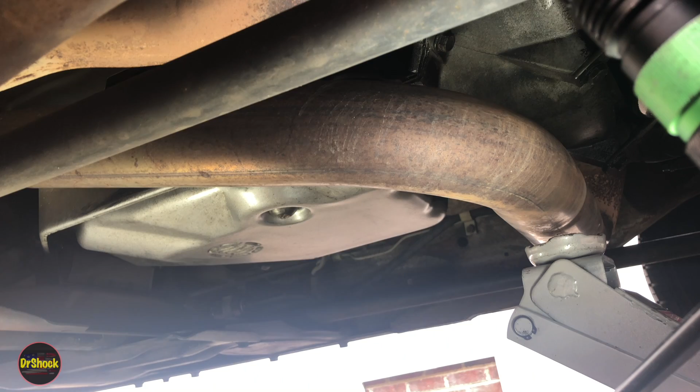Alright guys, in today's video I'm going to go over maintenance. We're going to do 4L80E automatic transmission maintenance. You should always change the fluid in a 4L80E every 100,000 miles, 50,000 if you're towing or you're living in a mountainous or hilly terrain area. So this is a good video and a good increment to share with you if you don't currently have the owner's manual for your old body style GM truck.

We're working on a 1998 right now, and in 1998 it had a Torx type bolt, a T55. Fits in like that. Now these can get kind of stripped out over the years, especially with the amount of time we're talking about here. So what I use to get these out to avoid damaging them any further, just bring a jack in, bring a piece of wood, and what we'll do is we'll get this guy in here on this piece of wood.

Like that, and that just gives us a little bit of upward force. We don't actually want to try to jack up anything. We just want to get some upward force so that we got good bite into this Torx bolt. Just like that. Bring our pan over here.

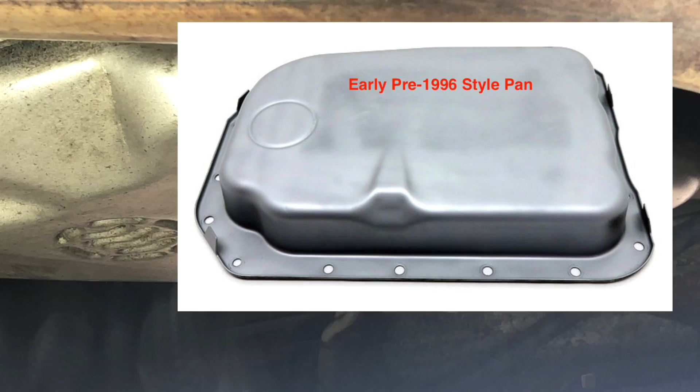I'm going to show you the other kind of bolt that you can encounter besides this T55. There's a more standard looking bolt, but it's still not exactly normal. And then also, if you've got a very early 4L80E from the early 90s, or you're working on one that's got military heritage out of a Humvee, it won't have a drain plug at all. And I'll show you how you can deal with that problem as well. So we're going to let this all drain out here, and while it's draining out, I'll go show you another truck that has the other style of drain plug.

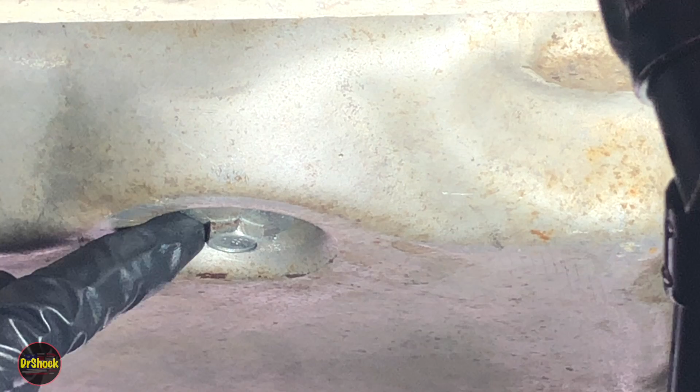Alright guys, here's a later 4L80E, and you can see on this one we've got a standard type of hex head. It's a 15 millimeter, but it's still not a standard, right? It's a very half-high. If we zoom in, you can see it's a half-high type bolt. So even on this type, you got to be careful not to use a 12-point socket, but only a 6-point socket to get it off. But this would be the AC Delco service type of drain plug.

Now, if you've got the older one, like I said, that has no drain plug at all, it'll still have this indentation in the pan. You'll still have these swiggles over here where the magnet is on the other side. There just won't be anything here, and I'll put a picture of one of those up in the upper right corner of the video for comparison.

Alright guys, this has dripped down enough. We're going to put the drain plug back in. This is just a closer up view of this T55 type original one that's kind of like a dome head to it. It's got an integrated rubber gasket on the bottom.

Alright, so now to get the pan off, we got 18 or so 10 millimeter bolts running around the perimeter. It's all pretty straightforward except for these ones in the back. These ones in the back come up with 3/8 hardware. What you'll see is that the rear transmission mount is going to get in your way on being able to get a socket on these 10s that are here. And what you'll have to do is use 1/4 inch hardware to fit in there.

The other thing I'd point out to you is this particular one over here. You notice there's a hole in the frame cross member. That's there on purpose for doing this particular maintenance. You run your socket extension up through this hole. You put the socket on. And now we have access to this bolt that's here.

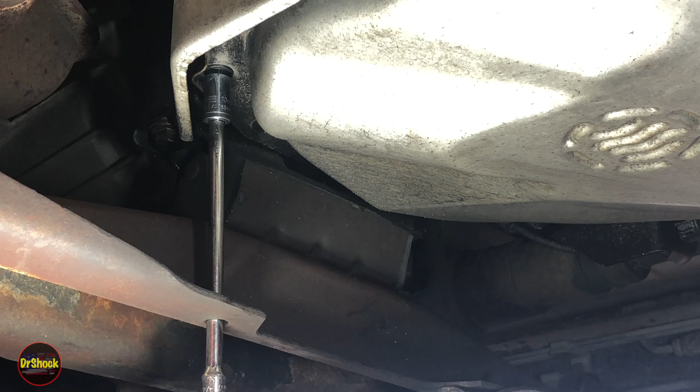So I'm going to go around with this breaker bar. I'm going to break the torque on all these, and then we'll zip them off, and then I'll show you which ones we leave on to deal with the case if you don't have a drain plug on your pan, if you have a very early 4L80E. Alright guys, right beside this service access port here, there's also another one over here to help you get the corresponding transmission pan bolt that's right above this one.

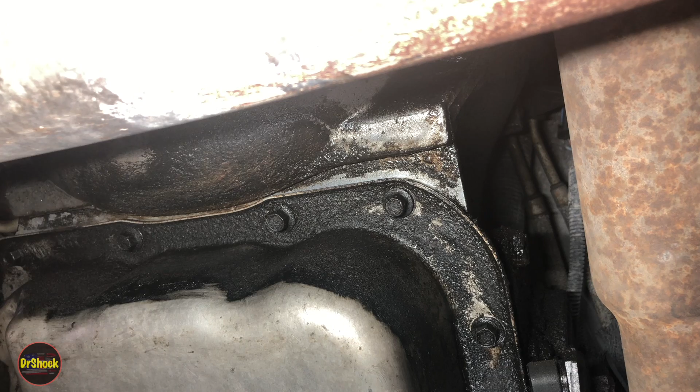Alright guys, we're on number 17 here. I guess there's 17 of these. Breaking the torque on this last one. Alright, now we're going to switch to the electric ratchet and we're going to zip these guys off. And we'll go through as if we didn't have a drain plug. That means I'm going to leave this guy that I just loosened up here, and I'm going to leave the one that's exactly opposite on the corner down here. I'm going to leave these two on, and I'm going to take everything else off. We're going to fast forward through this because there's nothing really to see. We're just removing fasteners.

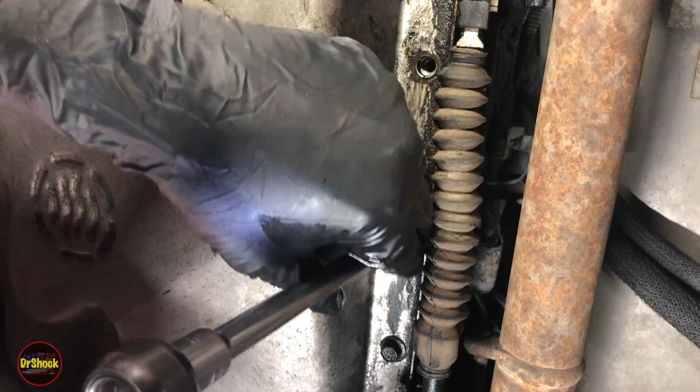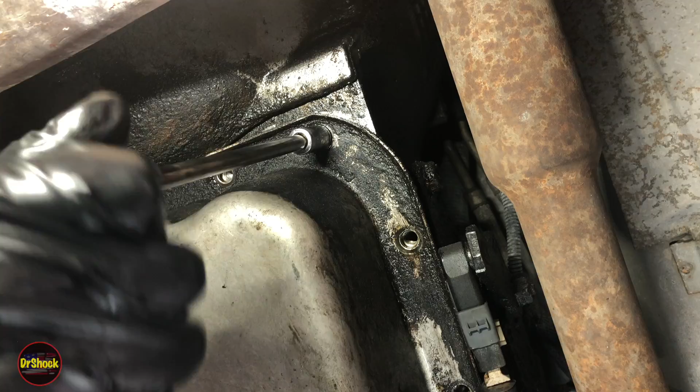All right, so if we didn't miss anything, we've gotten all these. Let's do a real quick finger check. All right, so we've just got the one in the corners. So we're going to loosen these up now. I'm not going to remove them though. Just going to make sure we got them where we can move them by hand. That one feels good.

Slip this guy in without going through the hole because he's already loose now, so we don't have to. And our pan is going to let go nicely. All right, so what we're going to do now is I'm going to bring another kind of drain apparatus into position.

You can use a large basting tray as well. But we just want to have some more width to what we've got to work with here than we get with just the standard pan. Reposition the light for you guys.

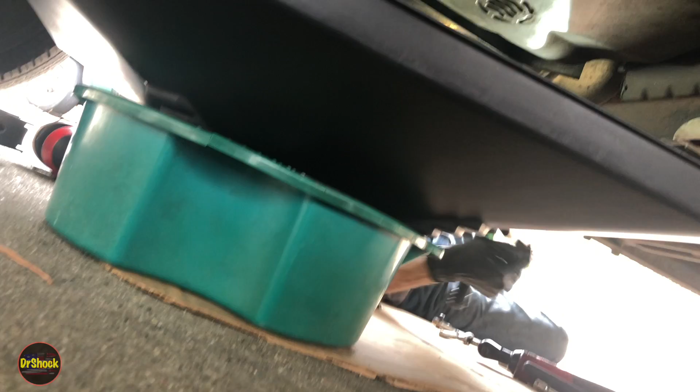All right, so now if I don't have a drain plug, this guy's full of fluid. So what I'm going to do is get this where I can remove it by hand. I'm going to pull this back to completely cover the dimensions of the pan. I'm going to take this guy almost all the way out. And I'm going to start doing the same thing for the one that we had up in this corner up here.

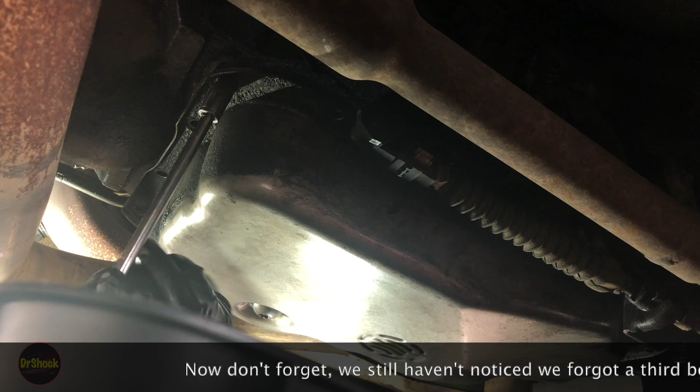All right, so now it should be at a point where I can take them off with my finger. So push up on the pan, take this guy in the back out. Again, we're just doing this for those of you that don't have a drain plug. Obviously, we don't need to go through all these gyrations normally. Take this one off up here.

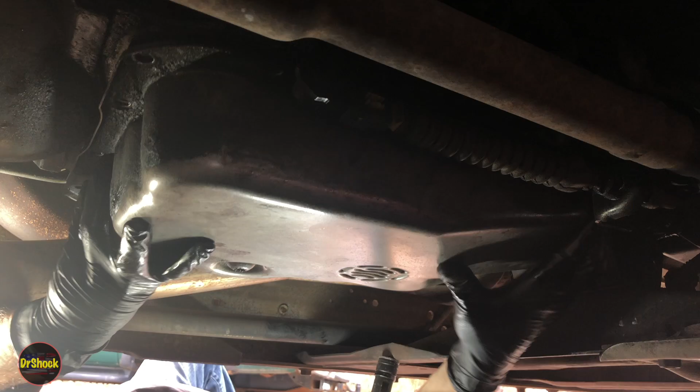Because now you've got a controlled drop, right? So normally this would be full of fluid. You'd let it down. You got to get it off of the parking cable assembly over here. And that's when it's going to start dripping out. Of course, what you don't want to do is what I just did. I left one bolt in up here. Sorry about that, guys. Didn't see him back here.

All right, so now you work him off of that parking cable assembly like this, and then you'll be able to let it drip on this corner that I'm holding, just like you see there. And now you can hold it and do a controlled drain. I know I'm blocking your view at this point, but you guys get the idea. So at this point, I'm just going to lay this guy in this oversized pan so that we can see up on top here. So a quick wipe off of any dirt on my hands, gloves.

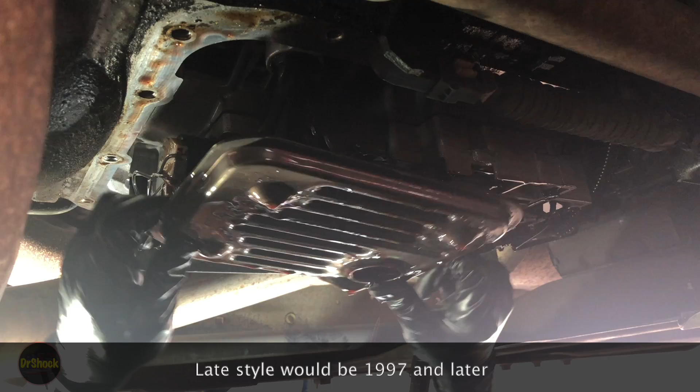Next, we've got the filter. So this is a late style filter. There's a late style and an early style. Filter just comes off by wiggling it off. And then there's a bushing up there we have to replace as well. We'll let this drip some more, and I'll show you replacing that bushing.

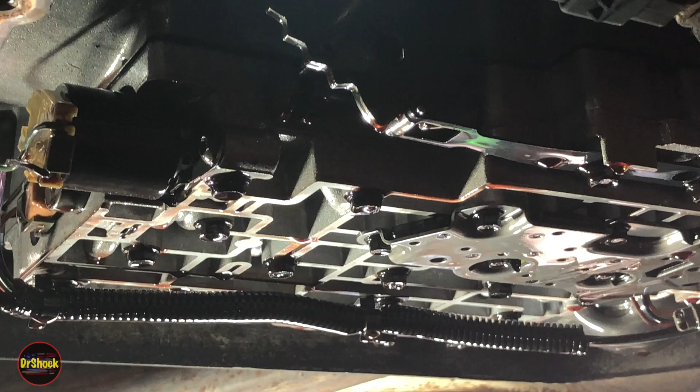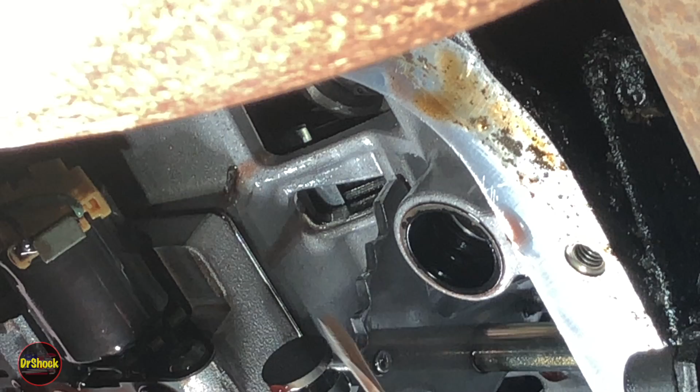All right, guys, we're on the driver's side here, and here is our filter bushing right here. It's press fit into the case. The case is aluminum. The bushing is rubber-clad steel. There's a couple of ways you can remove it. If you have a blind hole puller, you can pull it in here, and you can use a slide hammer to take it out. I prefer the deform method. I'm going to deform the bushing so that we can pull it out that way.

I just prefer to use a screwdriver to start, but you don't want to finish it with that because that kind of tool can be damaged, so we're just going to switch to a small 1/4 chisel now. Guys, I'm not trying to be gentle with it, but it's an awkward position I'm in because of the camera.

All right, there we go. It's a little bit more awkward having the camera in the way. It doesn't normally take that long to do this. What I'm showing you here is you want to see that on the aluminum, we don't want to cause any damage to the outside or this chamfering in the middle.

So now what we're going to have to do is go all around the gasket sealing surface. We're going to have to clean off all the dirt that has intruded into that, get all this cleaned off all around the perimeter, and then we'll clean the pan and check the magnet. All right, let's pull out what we've got.

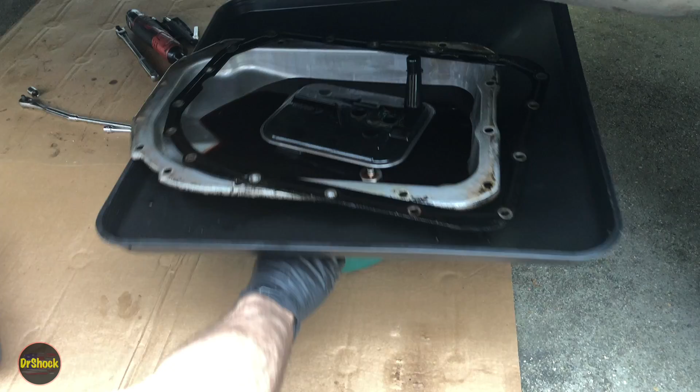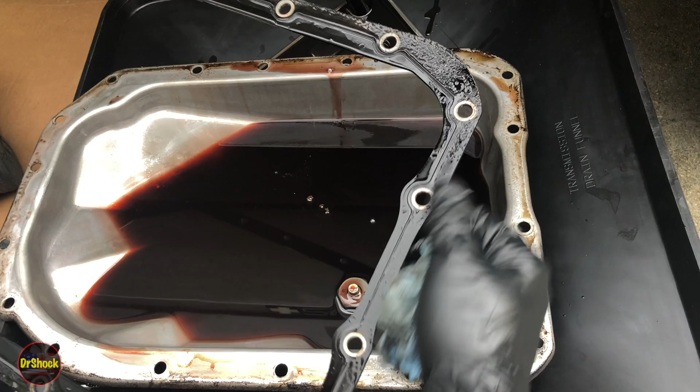Get this guy over here where it can drain. Now these factory gaskets, these are completely reusable as long as they're not cracked or broken, and as long as these stainless inserts are all still secure. So that's one of the advantages of using OEM parts. Let's go ahead and dump this out.

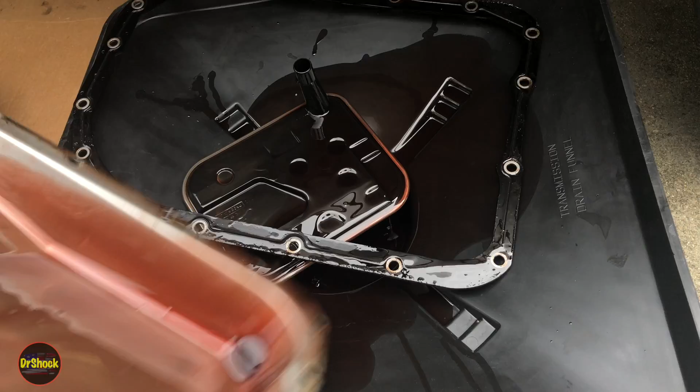So then what we'll get going here is we'll give this a cleaning, but the most important thing you want to check right off the bat is we don't see any large chunks or slivers or pieces of obvious metal fragments sticking to the magnet. That's what we want to be looking for. What we have is this kind of dust, which is just normal wear.

So we're going to brake clean this all out. Get as much of this in here as we can so it can be recycled. We'll brake clean it all out. We'll do some cosmetic cleaning on the outside. We'll clean up the gasket and reuse it, and we'll show you the new filter and installing the new bushing.

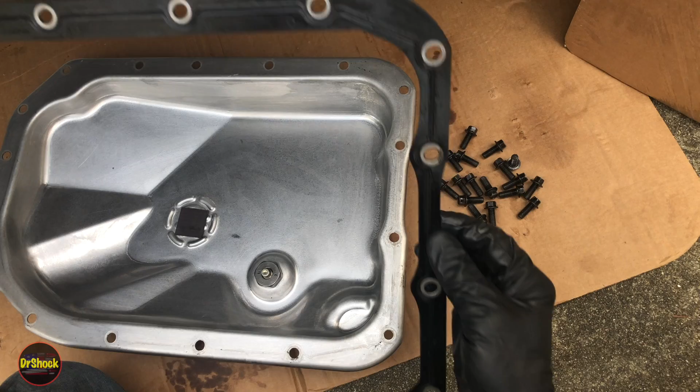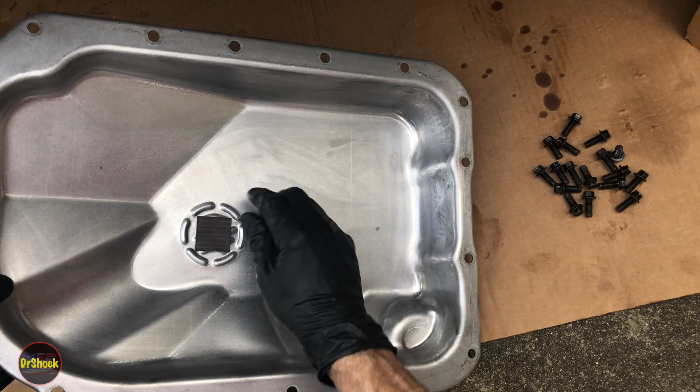All right, guys, we've got this all cleaned up. There's our original gasket. No cracks. None of the inserts are damaged or loose, so we're going to reuse this guy. We got the pan and the magnet all cleaned. You definitely want to have this magnet be here. If yours is missing, I'll leave a part number in the description so that you can order a replacement. This is the level of clean we want.

On this side, we're not after as much because this is going to get dirty anyway, but we scraped off a lot of this dried up mud. There was also some oil from a previous engine oil leak that had dried up on here, so we got all that cleaned up. So we're ready to reinstall the pan and the gasket. We've also cleaned up the 17 bolts.

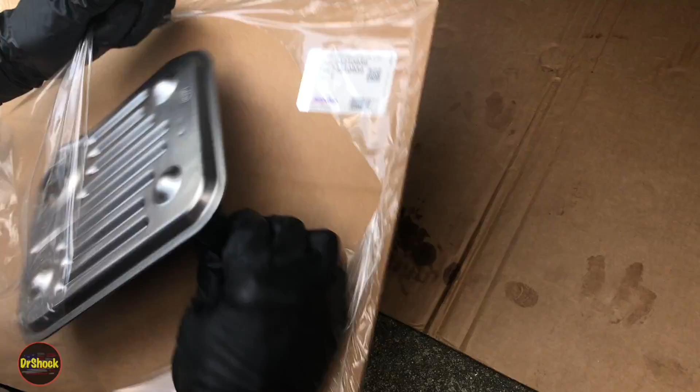And what we're going to be putting as far as the service package together is this GM 24210956, and what that is, a new filter and a new bushing. So the filter's obvious how that goes in. I'll show you that in a minute, but now we got to install this new bushing to take the place of the one we took out. So we'll go back on the other side and we'll push this guy in.

All right, guys, we're going to install this bushing with a 28 millimeter outer and a 19 millimeter inner. There's just some residual transmission fluid on the bore. We don't particularly make any effort to lubricate anything, but whatever's there is fine. You don't have to brake clean out the interior. In fact, I would highly recommend you do not squirt anything up there like that.

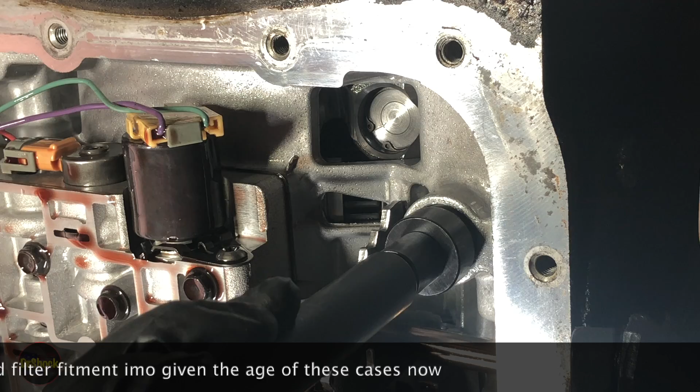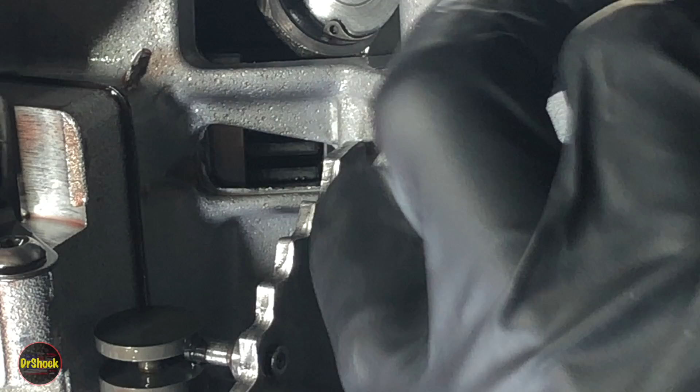You'll hear that sound it makes when it fully seats. So you know you're done. Reach over here and grab our filter. Now for the filter, I'm just going to take a little bit, very tiny amount, and then I'm going to wipe it off. Like a microscopic film that you can't even hardly feel, just so that it slides in better. It still should be difficult, but this will make it a little bit easier.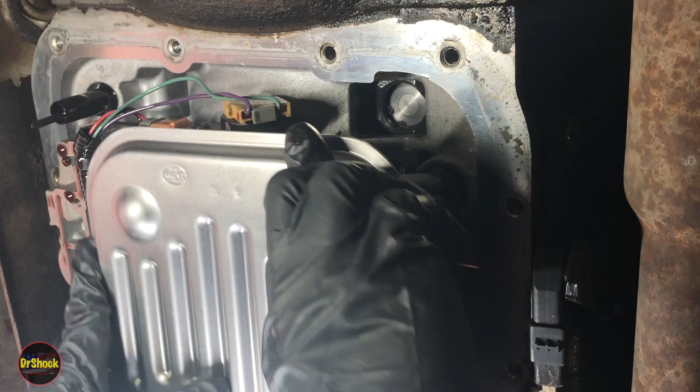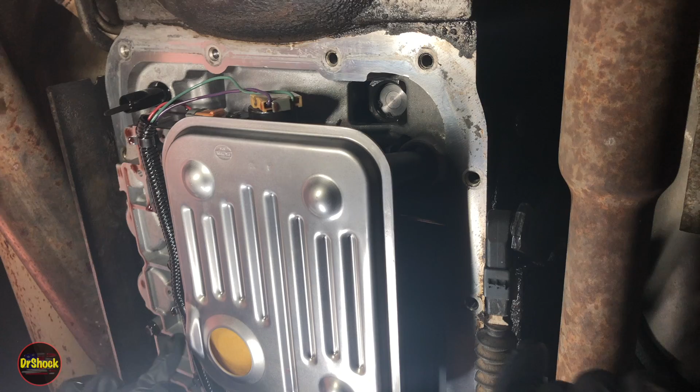There we go. Nice tight fit, but still no damage to the bushing where the rubber is clad on the interior. Okay, at this point, I'm going to have to reposition myself, and we're going to put the pan back on, and we'll start those bolts up. All right, so like I said, this is a late style filter. It's got some little feet. They're going to sit on the pan. We're going to bring the pan into position, try to keep the gasket lined up. We're going to run it under the shift mechanism.

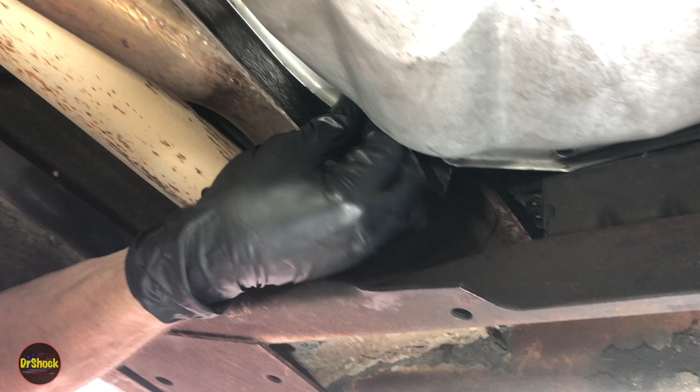All right. Then we're going to try to get this bolt going on this side first. And we're going to start them in by hand. Remember, steel bolts into an aluminum case, always start by hand. Finger tight will hold everything in position. And then I'm just going to go around here, guys. Put the one in the back corner here next, just like we did before when we were removing it in this case where there was no drain plug on the pan.

Just give it a little push up. Finger tighten this guy in. I know you can't see, but you saw in the front what I'm doing here.

All right, so now we're just going to go on each one of these and do the same thing, except I'm not going to run them all down by hand. That's too time consuming. I'm just going to get them started. And the reason we didn't tighten everything down is in some cases like this one, I had to push the gasket out of the way a little bit. We'll run them all down with the electric ratchet, and then we'll come back around and we'll torque them to the value I showed you earlier in the service manual. So I'm going to go ahead and do this, and then we'll come back when it's time to torque.

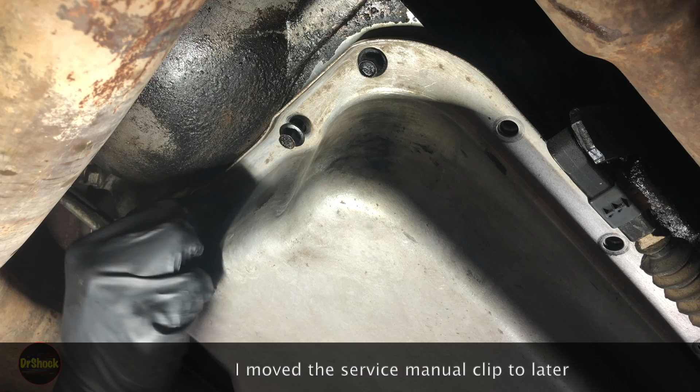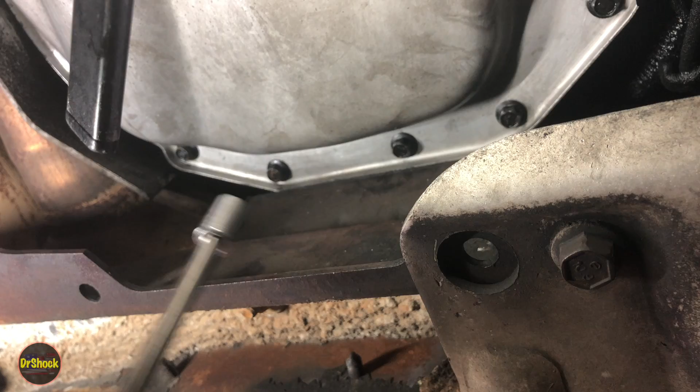All right, guys, we're just here at the back, just checking the torque on this one that I just did. This guy here. Now these get, like we saw in the service manual, I'm making a satisfying click, but there it is. All right, 18 foot-pounds. Come up through this access hole here to get this guy.

All right, so those all sounded good. Wonder why this guy just didn't sound healthy. There we go. All right, so those are all torqued, all 17 of them, to 18 foot-pounds. Our drain plug bolt, this guy gets torqued to 25 foot-pounds. So I'd recommend you do the same thing, if you have the Torx type, with the little block of wood between the torque wrench and this guy to keep it from stripping. All right, we're ready to go up on top and start filling her up.

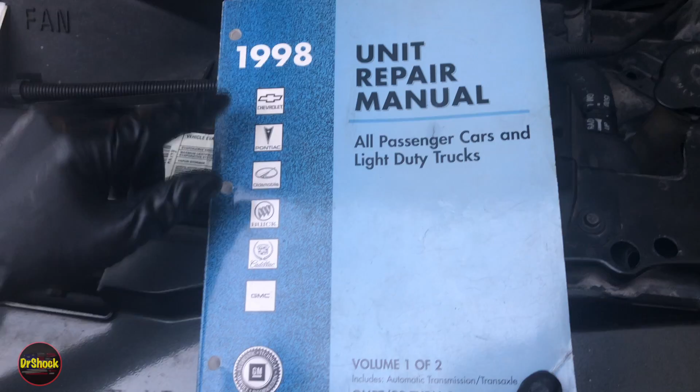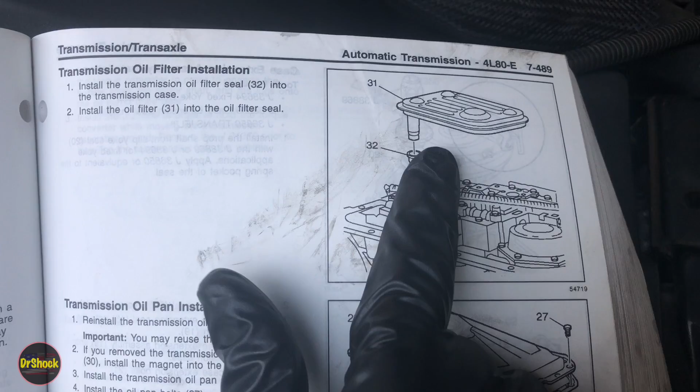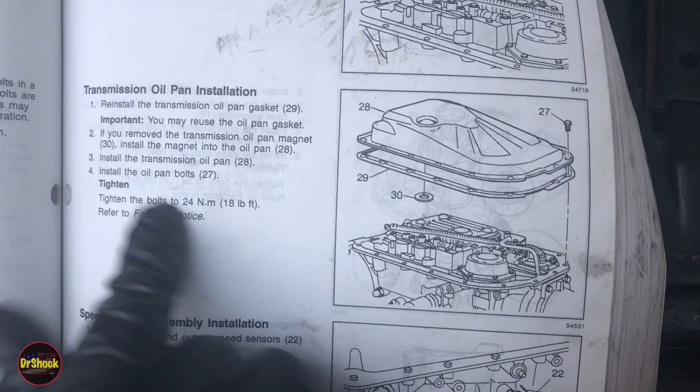All right, let's take a look at the service manual. We've got the 1998 unit repair manual. We're going to go over to the 4L80E section, and we're going to look at the section about the transmission filter installation. So here's just a picture of that, the filter and the bushing or the seal. Here's the pan, pointing out that you can reuse the pan gasket like I mentioned. There's no particular ordering to these 10mm bolts, but they get torqued to 18 foot-pounds. Now you notice on the picture here, this is an old drawing from the original 4L80E. There is no drain plug, like I was mentioning earlier. So they don't talk about the torque for this in this write-up.

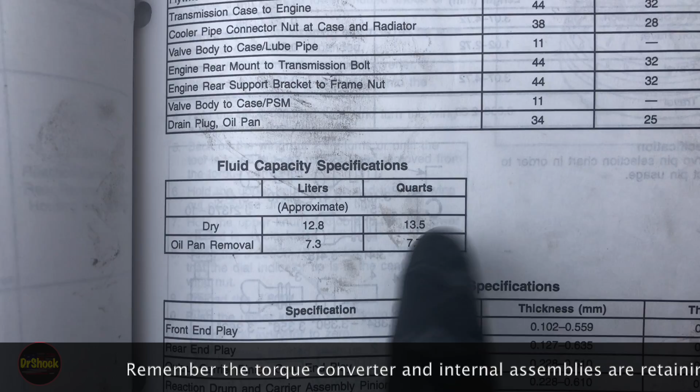We have to actually go to the front of this, and we can see a couple other pieces of information. First of all, we can see the oil pan drain plug is 25 foot-pounds or 34 newton meters. And again, oil pan to case, 18 foot-pounds or 24 newton meters. We can see that with removal of the oil pan, she should hold approximately 7.7 quarts. Dry would be a rebuild. So 7.7 quarts should be about what we're looking at. Now, how do we go about refilling it? Well, I'm going to consult a different book for that. We're going to go to the 98 Service Manual, Volume 4, and we're going to go over here to the transmission fluid checking procedure.

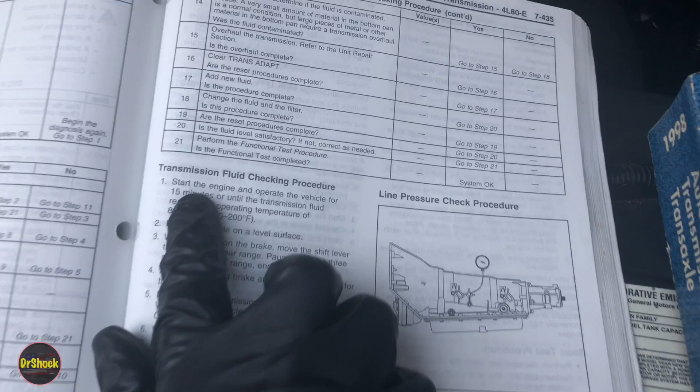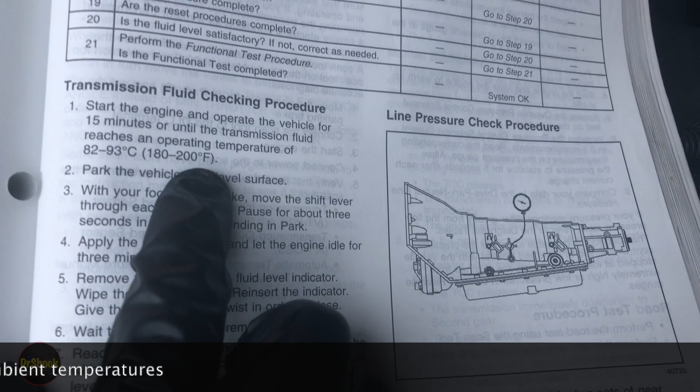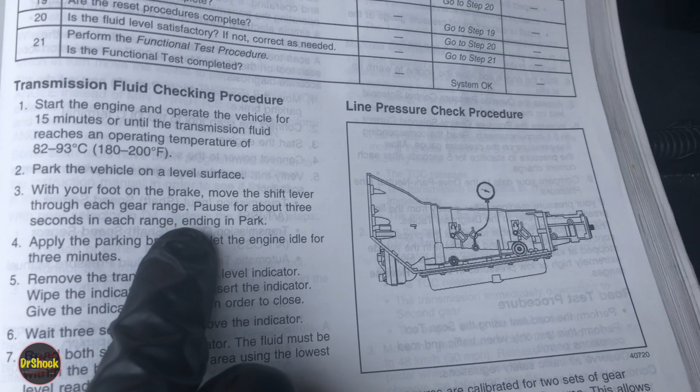So start the engine, let it run for 15 minutes. We're going to use a scan tool to see that we get up to this temperature of between 180 and 200 degrees Fahrenheit. The fluid level is not accurate on any GM transmission until it's warm. So we got to get this up to temperature. Got to get it on a level area. You can't be on an incline on a driveway. You got to be level to do this test. With your foot on the brake, you're going to move through the gear range. This is going to cycle fluid through all of the different gears so that all the fluid gets through the channels in the valve body, and we push all the air out. That also helps with heating everything up.

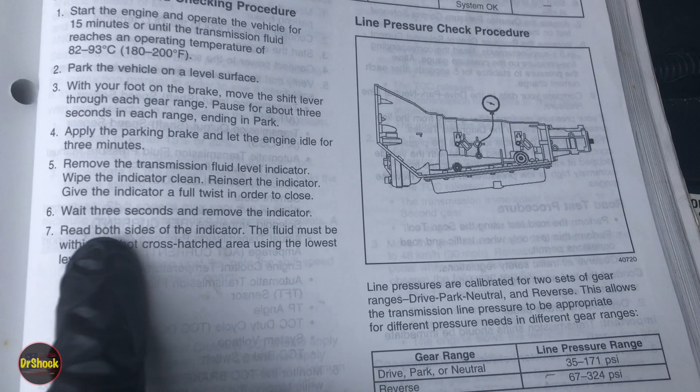We're going to let it idle for 3 minutes after we go through the cycling, and it gets to this temperature. Then we'll be able to pull the dipstick and check to see where we're at, and then keep adding to get to where we need to be. Wait a few seconds, remove it, and check it again, right? Again, there's a pro tip here. You always check both sides of the indicator, because sometimes you get splash on one side, and it might not be the actual reading. This applies to an oil dipstick as well.

So on these models, you're always going to find the dipstick here in the back. There's a lock. Pops like that. If yours is busted or doesn't stay in place, I did a video a while back on these. I'll put it up in the upper right, link it to show you how to replace this and what the part number would be. So we're just going to take this guy. We're just going to wipe him off so that we don't have any spillage. Whoops. Got a towel that doesn't want to be used here.

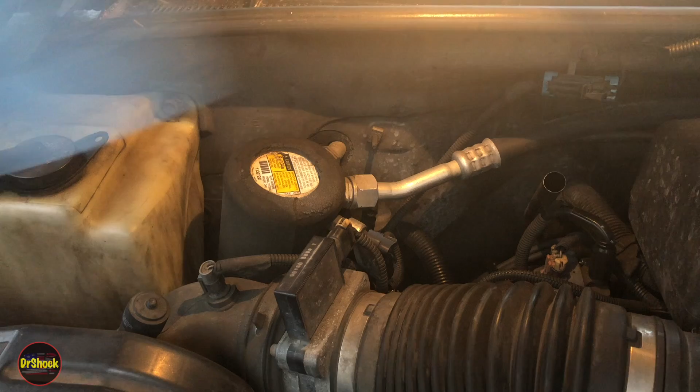And we're going to insert a long funnel that fits into this just perfectly. And then what we've got here is a gallon of AC Delco Dexron 6 ATF, and then we've got 2 more quarts. This will give us about what we need. If not, we have some extra.

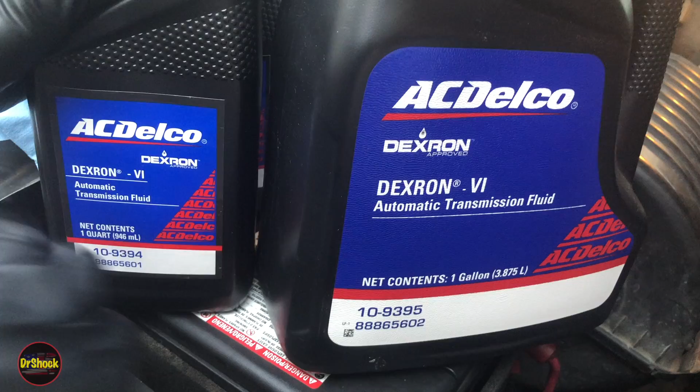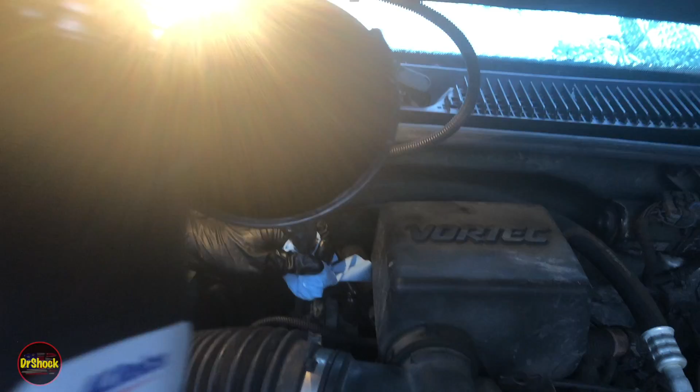So what I'm going to start with is adding the gallon. Then we're going to do the procedure I showed you, and then we're going to check the fluid level from there, and we're going to add the smaller ones as we go. So we're just going to pour this whole guy in first. Now, just in case we get a little leakage, I'm going to hold it at the base. And then we'll come back after we get to the point of warming up the engine.

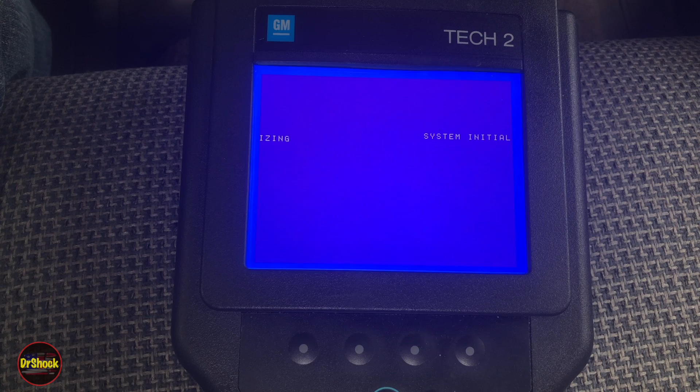All right, guys, we're going to start the truck up. And for this check, we're going to need a bidirectional scan tool that's capable of reading the sensor in the transmission that indicates its temperature. So let me get this Tech 2 fired up here, and we'll show you what that looks like.

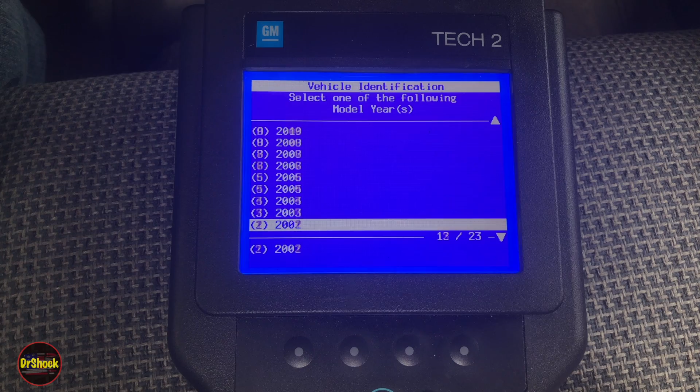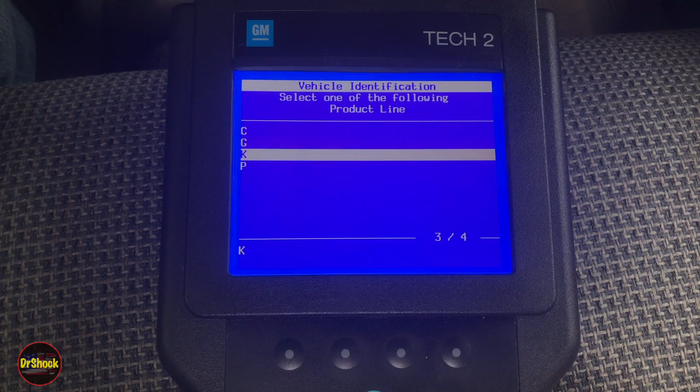So why are we having to check this? Well, if we just put in the 7.7 that we saw in the service manual, there's a very good chance that'll overflow it. Because in reality, between 4 and 5 quarts, in my experience, is all that you need on a pan drop and filter change like this. So we want to make sure we get this right, just like the service manual says. We got to have a way to read this.

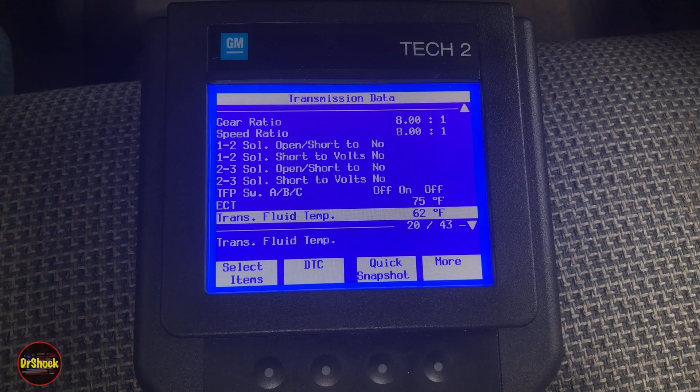So as soon as we get the transmission data up here, we're going to search for the PID for the temperature. There it is, right there. Okay. Get it up here in the middle. So right now we're sitting at 62 degrees Fahrenheit, so we got a long ways to go. We saw in there 180 to 200 degrees Fahrenheit.

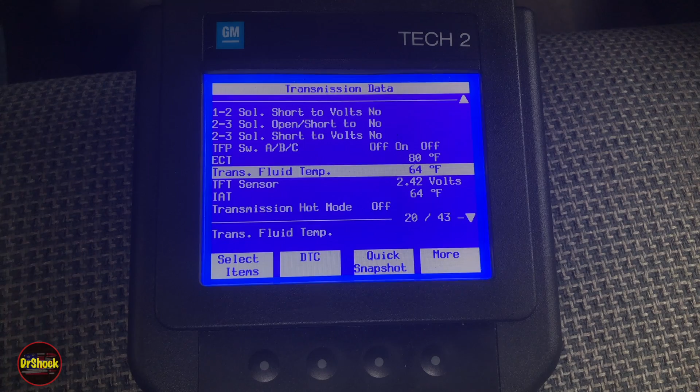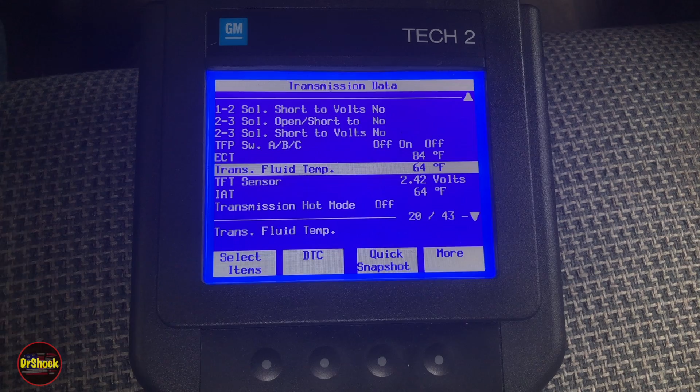Now what the service manual doesn't indicate is that temperature doesn't take into account ambient. In the summertime, that was probably a good range. We're sitting here in late winter, and there's no way this is going to get up to 180 degrees with the cooler taking that ambient air in. So you're going to hunt for the temperature where it maxes out after that 15 minutes of activity. For this ambient temperature, which is in the 50s, I'm going to expect somewhere between 140 and 150. In the summer, I would expect 180 or more like we saw in the service manual.

So what are we going to do? Well, we're going to let it idle for about 5 minutes, and then we're going to work it through the gears like we saw in the service manual. I'll go ahead and do that now to show you. If we look on the dash, all they were suggesting was that you work it into each gear. So reverse, 1, 2, 3, neutral, 1, 2, 3, drive, 1, 2, 3, right? 3 seconds in each one, and walk it down.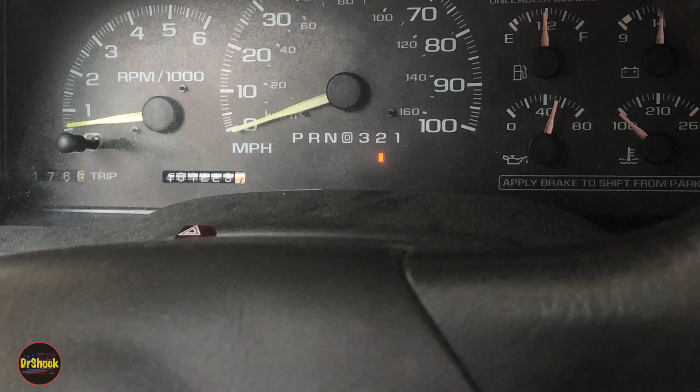And what you should be feeling for is it engaging. If you don't have enough fluid, it's not going to engage, so it's not going to move. So you walk through these. That helps get all the air purged out of the valve body and the channels inside the case. And then if you feel it engaging, you might have enough to do the rest of this test for the last 10 minutes, right?

So it says you want to have the vehicle active. You don't want to take it on the highway or anything like that, but drive it around the parking lot of your shop, around the building, in a neighborhood, around the block. That's all you really need to do.

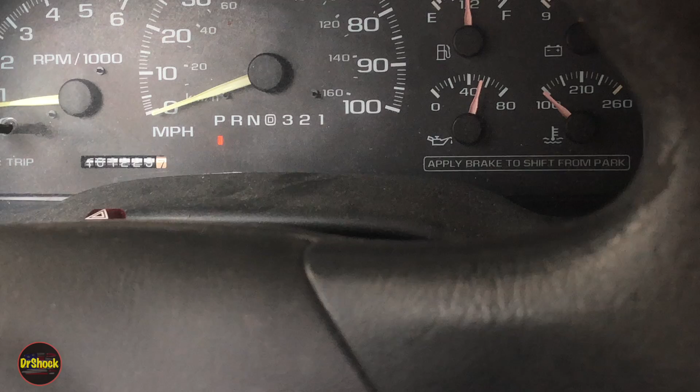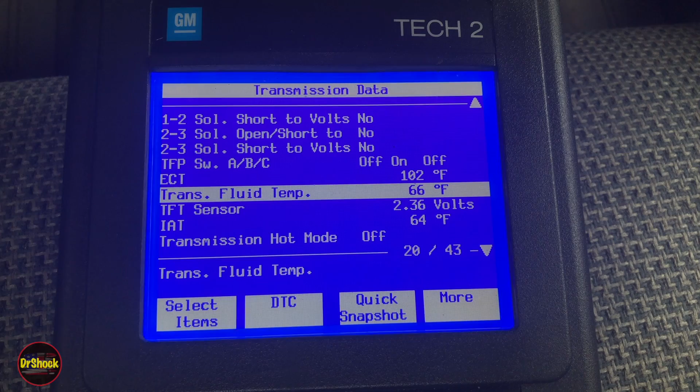So I can't feel it engaging in drive yet. We only put in that 1 gallon container. And just walking through the gears like that, we can see we're already up to 66 degrees. So it'll start climbing steadily, but slowly. I might take the 1 quart size and add a third of that until I can feel each position engaged. And when I see that it's engaging and it looks like it's going to move, we'll drive it around the block a few times and get it up to temperature.

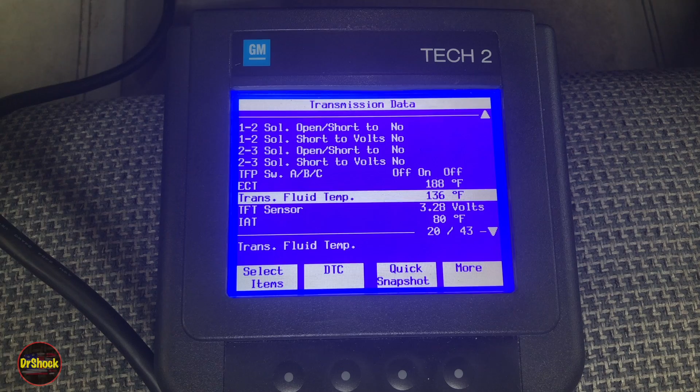And then we'll come back. All right, guys, we've been driving around about 10 minutes, maybe a little bit more than that. Ambient temperature, 57, 58 degrees outside here in late winter, and this has been bouncing around between 135 and 138 degrees. I think we've found our ceiling of how hot it's going to be given the outside temperature. So let's go ahead, pop under the hood, and check the level.

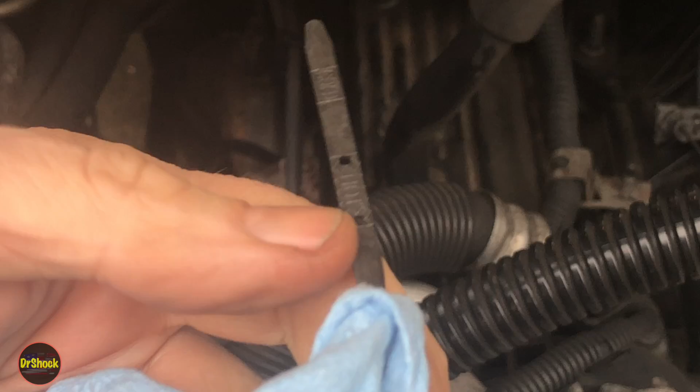All right, guys, while it's still hot with the engine back off again, let's go ahead and see where we are. We're going to clean everything off. And what you're looking at here, right, so you got a cold section and a hot section. Hopefully that's coming out. And we want this to be between these 2 dots. Now how much is in here?

Well, in order to make sure that everything was shifting properly, we used a little bit more than half of that 1 quart. So we've got a gallon in there, it's 4. Plus that means we're sitting somewhere north of 4.5. So you might have too much. Let's see. Yeah, we are sitting here, and we want to be down here. So we got to take a few ounces back out.

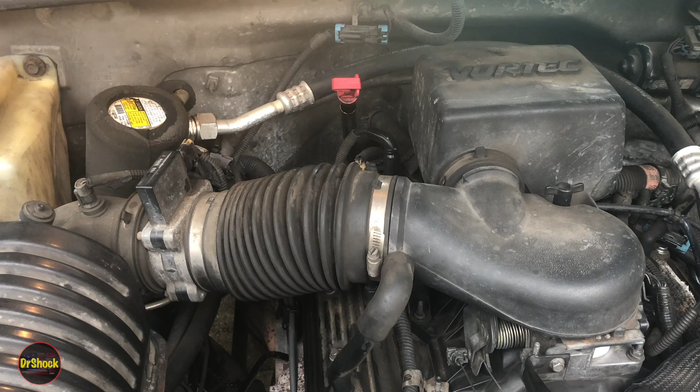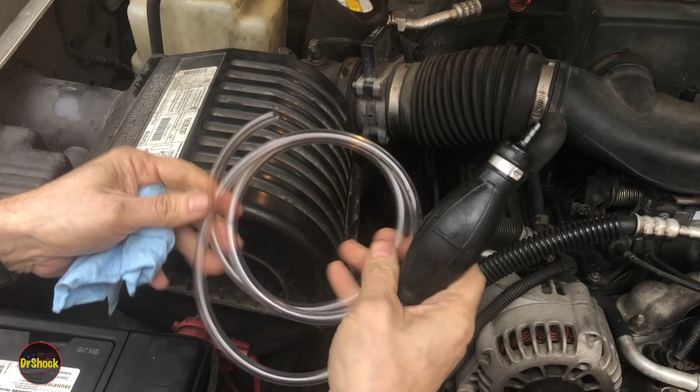So how do we do that when you have too much? Well, I use this kind of tool like this. Just run this pipe down the dipstick and pump it out. This is something you would purchase for siphoning gasoline, but I only use transmission fluid on this, so that's the only thing that's ever been in here. You can still see a little bit of residual trans fluid from the last job I did on somebody else's vehicle. So we're going to draw this down a couple ounces at a time while it's hot until we get it into the sweet spot. And I'll show you where we end up.

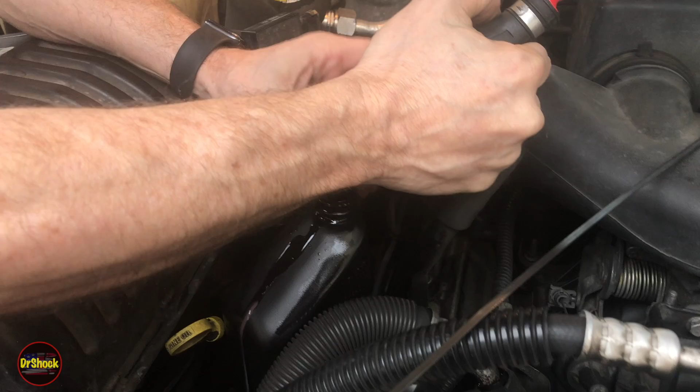All right, guys, I'm just taking a little bit out of here. You get like a siphon effect going, so just want to be careful how much you take out. So we'll come back down when we get it to where I think is the sweet spot.

All right, guys, we've taken a few ounces out, maybe 3. Get this where it's not going to leak anywhere. We put it back in the containers because we can definitely reuse that. We don't have any significant use on it. Now let's see if we got this where we want it. Let's see where we're at now.

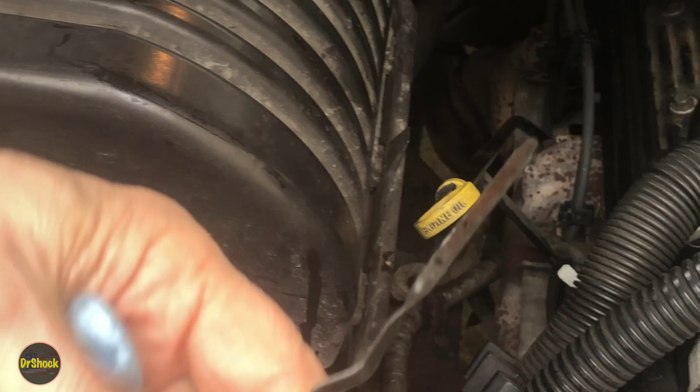Close enough. We might be a 1/16 of an inch above that hot mark, right? You can see where we're at, just slightly above. Unfortunately, if I try to use this technique, I might invariably pull more out than I want. So I'm going to call that done. We wanted to get this test done quickly, because when she starts cooling back down, we won't get an accurate reading. So on this particular transmission, for a filter and pan drop change, we ended up putting in 4.3 quarts to top it off.

So you might wonder, why does the service manual say 7.7? Well, that's the most, and it could vary. How much is still in the torque converter, how much is in the valve body, how much is still up in the internals of the transmission case. It's going to vary, so your mileage may vary. So that's why you do this very specific test from the service manual.

Well, what if you don't have a tool that can read the temperature, or a smartphone app with one of those little Bluetooth dongles that lets you read the temperature of the transmission? Well, the backup way to do this, I would say, is measure exactly what you took out and put it back in. If you're absolutely sure you didn't spill anything, that is a semi-accurate way to at least get you back where you were. You don't know if you were low or over to begin with, but that'll get you back where you were. But the way I've showed you is the correct way to do it.